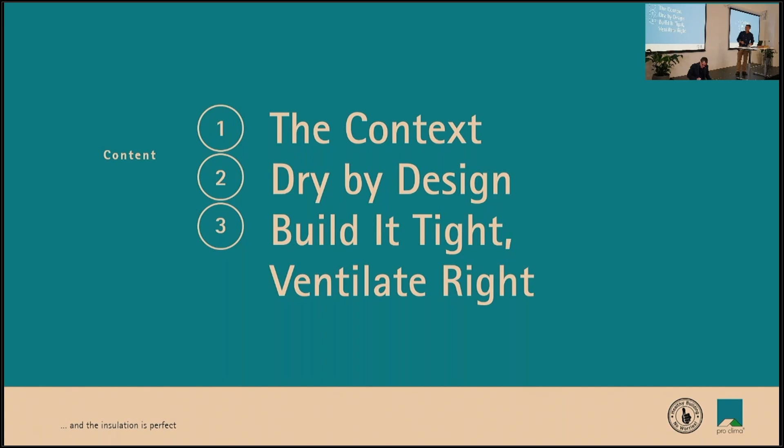In you come. Okay, clause E3, internal moisture. Yes, it is. It's not just bathrooms and kitchens. Now, the acceptable solution for E3, all it does is offer us acceptable solutions for drips and leaks. That's what most of it's talking about. So surely there's more to it than that.

As John said, I actually spent 15 years as a primary school teacher, and it introduced me to many a naughty child. They would sit at the back, disrupt the class, spread their malevolence, and cause damage wherever they could. These naughty children, though, were often just looking for acknowledgement and some kind of affection. If you can develop a relationship with those naughty people, give them the time of day and show some kindness, learn to understand them, they can become a very successful member of the classroom and go into great things.

Now, the naughty child of E3 is just the same. If we don't give it the attention it deserves, it's going to cause problems further down the track, and it's going to give us headaches into the future.

If we don't give E3 the attention it needs and apply some knowledge to it, the mold will spread through our homes, and the debilitating conditions that come with that are causing us enormous problems: asthma, inflammatory responses, poor attendance at work and at school. So the naughty little Johnny from E3, we need to look after.

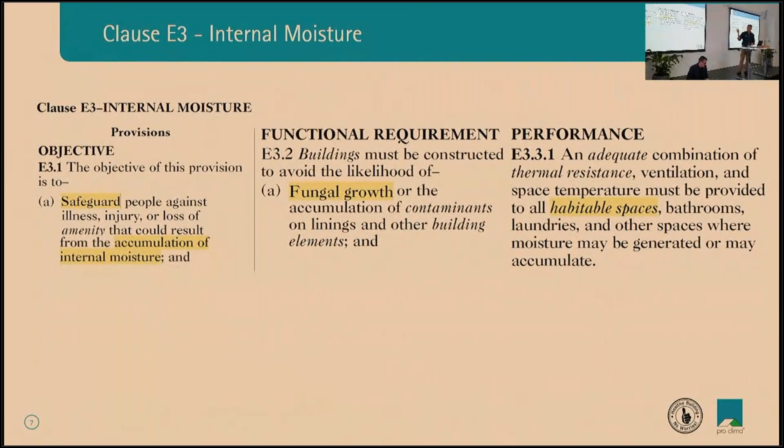Now, if we look, the E3 clauses are broken down into 3 parts. We have the objective, the functional requirements, and the performance. The objective is pretty clear. We need to safeguard from the accumulation of internal moisture. That's the objective of E3.

To reduce the risk of fungal growth in all habitable spaces. Well, if that's the case, why aren't we doing it? Why are we just hoping that steel framing without thermal breaks is going to work? Why are we just bandying it around and thinking, oh, well, it'll be okay?

Now, there's a big problem with this. Just like the naughty child in the classroom, if you ignore it, you wait, thinking it's somebody else's problem. As a teacher, I know I'm guilty of doing that. You have that kid that sits at the back and you think, no, it's term 2, I'm probably not going to change him. Term 3, well, it's nearly not my problem, is it? By the end of term 4, wait till Mr. Jones gets him.

And that's what we're doing with the problems when it comes to mold in our homes. We're making it so the designer pushes it onto the builder. The builder pushes it onto the homeowner. And by the time it's a problem for the homeowner, well, who's accountable then? Oh, that's because you're not using the home correctly. That's because you don't use the home right. Oh, so it's the homeowner's responsibility now to meet E3.

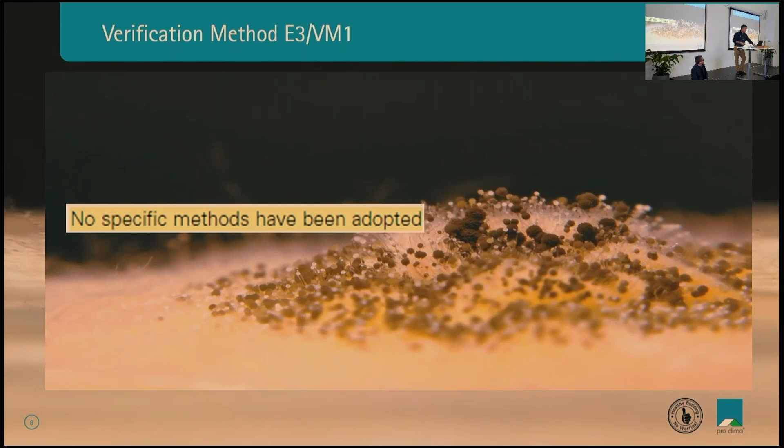So although the code knows all about naughty little Johnny in E3, we still have not adopted a verification method. There is no specific method adopted. We are using a trial and error approach. We are waiting to see what happens. Or let's put the steel beam in and hope it'll be okay. Or let's use this framing. Let's just use 90 mil of insulation. The trial and error method is proving not to work though, and we are getting mold in our homes.

Back in the good old days, we would have given Johnny just a clip around the ear and told him to sit down and shut up, all right? But thankfully, lots of things have changed.

Back in the good old days, we also lived very differently, and usually there was someone at home and the home fires were burning. New Zealand had a solid fuel dependency. We were burning coal and wood in our homes across the whole nation. Thankfully, that has also changed. The air is much cleaner as a result. I live in Christchurch, and pre-earthquake, you could see the smog thick across the environment, lying low. Now the air is much cleaner because we're not allowed to burn solid fuels.

But as a result, our homes are now getting stale air trapped inside them. And that's because the fires are drawing out, which we'll have a look at in a minute.

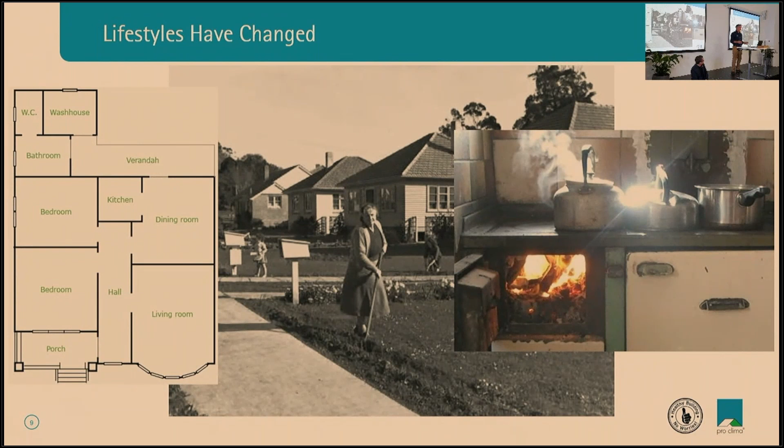When you have a look at this floor plan of a 1950s villa, I love the word villa because it's very romantic, but when you actually go and start flatting in a 1950s villa, there's nothing very romantic about it at all. It's extremely cold and uncomfortable.

You can see there that the wash house, top left there in the image, the toilet, the bathroom is actually outside the thermal envelope. So there's a floor plan on the left of the picture there. You've got the kitchen, the bedroom, the dining rooms. The living spaces are inside that thermal envelope.

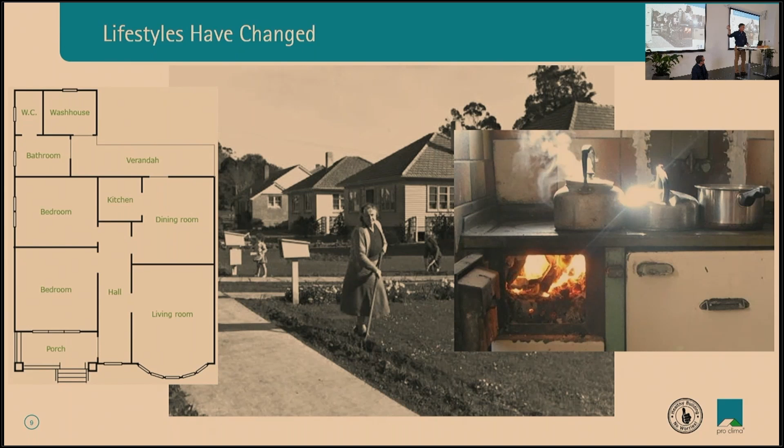And that was the way we used to live. But of course, it's the way we still do live. It's very much the floor plan of most people's homes in New Zealand, because not everybody is buying a brand new home. Now, the draw of the fire that was positioned in the kitchen there would suck air through that home.

When you burn in a wood burner or an open fire, it needs a huge air supply. And so what it was doing was continually drawing air through any nook and cranny that it could, through gaps in floorboards, through our double hung sash windows, under the door, and it was ventilating as it went the whole time.

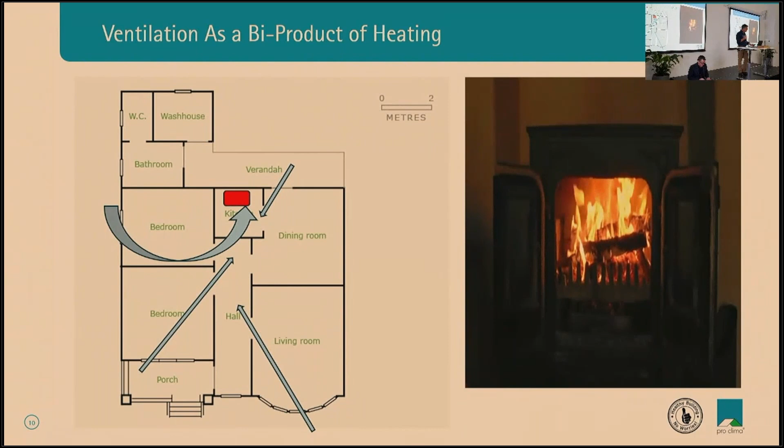So the heat inside the kitchen was often unbearable. If you can't stand the heat, get out of the kitchen. It was real. The living spaces were often overheated, while the extremities of the homes were far too cold to sit and snuggle down and read a book. And so the system worked for a while.

Now, in our major cities, the use of solid fuel is being banned, and the air is much cleaner as a result, as I said. But the lack of air movement causes an increase in relative humidity, and the mold will take hold.

The techniques mean that home is more airtight, and this is a good thing. An airtight home is a good thing. It's a bit like having an inner tube of a tire that it needs, if you want to pump it up, and you imagine the heat pump is like the bicycle pump. If you're pumping away and you've got a hole there, well, you just have to keep pumping, don't you? But if you can seal that home up, you're not continually pumping heat in.

But then you've got two people that have to be working long shifts. They're working full time. So they get up in the morning, these two occupants, they both have a shower because they've got to be nice and presentable for work. They then cook their lunches.

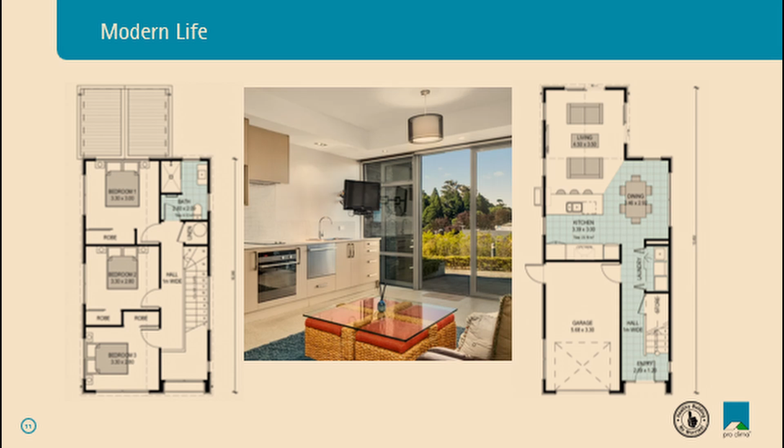People don't like to leave windows open because they don't want it to be cold. They don't want it to be risky. So now the relative humidity is high, and the mold has begun its day's work as well.

Mold's really important. It's a really important part of our ecosystem. Now these images here run through some of our temperatures from NIWA data, but if it wasn't for mold growing, our ecosystem would collapse. We need mold. It's one of the pioneer plants. Everything starts feeding with that and off that.

It's not a plant, of course, it's somewhere between. It's closer to being an animal than it is a plant, actually. If we have a look at the median annual average temperature, that's the map of New Zealand on the left-hand side of your screens.

You can see that most of New Zealand is a green colour. That means most of New Zealand is somewhere between 8 degrees Celsius and 14 degrees Celsius, over 24 hours, 365 days. There's only one little place way up north in Kaitaia that gets above that. So we're a heating climate.

That's really important. This is a climate that means we have to heat our homes. 20 degrees Celsius is a comfortable temperature for living. If we look at the graphs in the middle, we see the mean high temperatures. This is relevant because we're looking at what's going on at the highest points. You can see that our main centers, in orange in the middle, are only a few degrees apart.

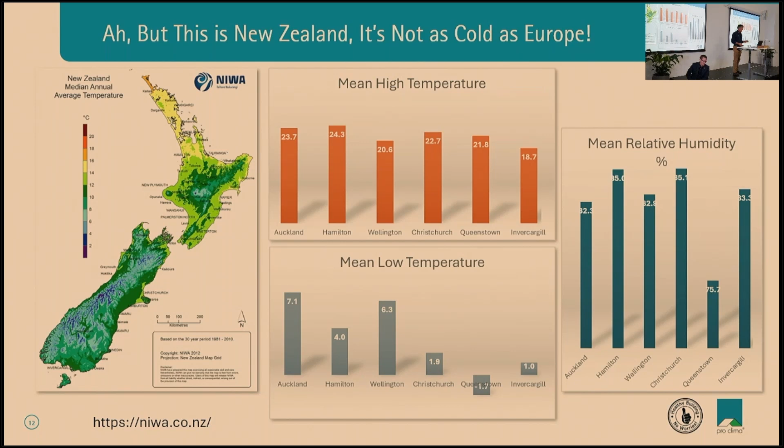This graph is a little bit strange, but I'll explain what's going on. On the right-hand side, we can see an image of a petri dish that's been left on the windowsill for a couple of weeks. Nothing has been planted in there - the mold spores just come from the air. It sits on a food source, it's got the right temperature and right humidity, and stuff starts growing. That's what happens in nature.

Let's have a look at a bit of why that happens. On the left-hand side, in the area that's now come up as red, you can see the number 1 - that indicates 1 day, how long it takes to germinate. If you look down the left-hand side of the graph, you'll see 65 to 100, which is a percentage of relative humidity. So between around 90 and just under 100, you get 1 day for germination of mold.

But the temperature is also important. If you look at the temperatures at the bottom of that graph, between 0 and 50, you can see it's somewhere between 20 and the mid-30s - it takes 1 day to germinate. So that means the mold spores, when they land on a food source, take 1 day before they start growing.

They sit there for a little bit, absorb some moisture, get some food, and start growing. So on all of your build sites, everything that's being built, you imagine how long it's exposed for before the doors are closed and you hand over the key. It's been covered in mold spores the whole time. It's got a high amount of relative humidity. The mold will start growing.

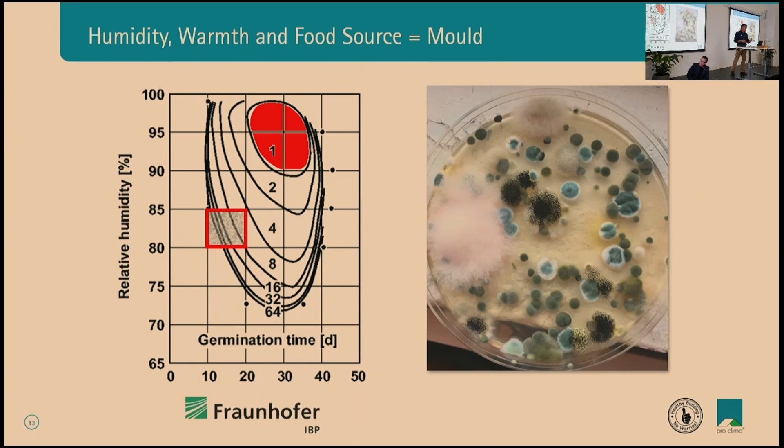Now, the code meets the needs of the homeowner if it's used correctly. The acceptable solutions seem to fall short of the mark, and words like 'adequate' certainly don't help. With no verification method, how is the industry supposed to know that their decisions of design and material combination will be adequate? But there are free versions of thermal modeling tools available - why aren't designers using them? This is where we go into our next poll.

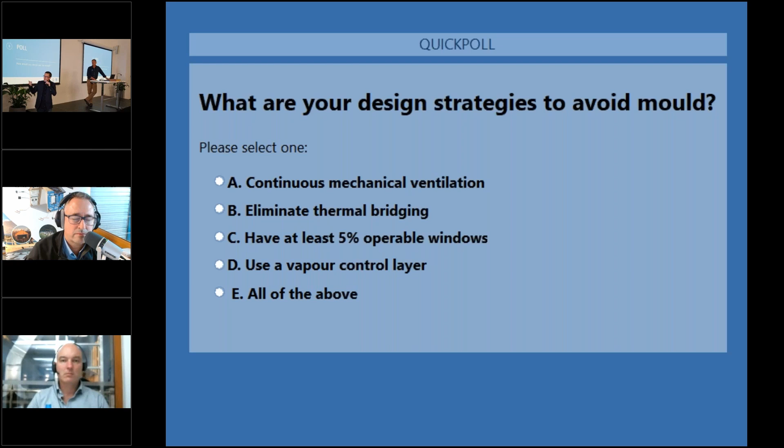Okay, cool. So what we'll do is call on our panelists to have a quick discussion on this one. If we can flick across to them, Richard and Simon. Hey, so Richard, you're not hearing us, I'm not sure why. Simon, have you got a comment maybe about the combination of all of those things?

Yeah, John, so from my perspective, I would go with A, B, and D. I think it's pretty important to have some sort of mechanical ventilation to ensure that we're replacing the air. Secondly, we want to do away with those thermal bridges. And thirdly, we need to have ideally a vapor control and air barrier to make sure that we stop the moisture going into the cold places in the first place.

Richard, your audio is terrible. Let's just kill that for now, and we'll see if we can get that back online. So I think we're going to turn this way again, and maybe, Ben, you could make... Oh, we've got them back up? No? Oh, the poll results from online. I'm sorry, okay, oh interesting.

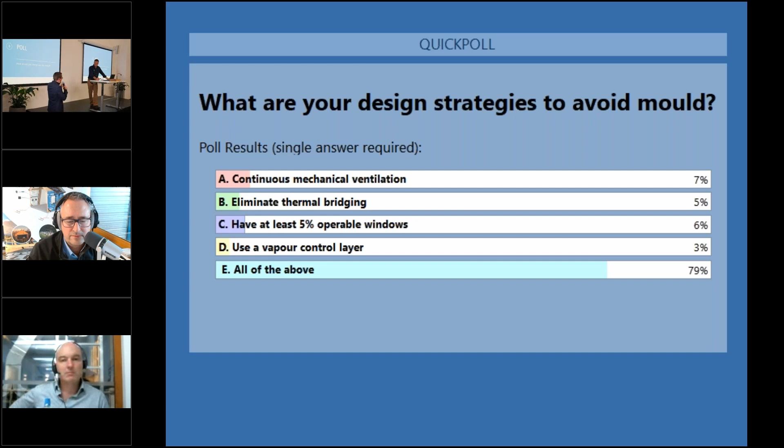Okay, so 79% of people said E, all of the above, and then we've got a mix, pretty much the same percentages across the other ones. If you were part of our H1 presentation, Kat talked specifically about what we do as a company, Pro Clima. We have a dedicated vapor control layer, but she didn't talk about that - she talked about every other material that you're already designing with that is already airtight. So that's the relationship with airtightness and then the 5% operable windows. I think you're going to dig into that in a wee bit. So if that was a bit confusing, Ben's going to unpack it all. Let's hand back to you, Ben.

Thank you, so I'm going to try and deconfuse them now. Yeah absolutely, that's your job. I'll do my best. Thanks for that, John.

Okay, so we're going to focus now on the design and how we can design out the problems with internal moisture. As we've seen, the code does know about mold. We understand it, it's there, and we also understand how it can be managed. But I wonder why we don't - why don't we do it then? Why aren't we thinking, I wonder if this will get moldy?

Two images here. This one on the left is taken just a few weeks ago down in Christchurch. It's a new build, lovely suburb, right on the waterfront. It's actually so on the waterfront that it's had to be built 1.5 meters up, just in case the inundation zone that was marked on the map a few years ago is real, and it's a flood risk. Because it's so close to the water, it's going to have high relative humidities. You're going to get sea fogs rolling in, and you're going to get a lot of moisture in the air there. I asked the builder what he was going to insulate the steel beam with.

He looked at me and said, oh, I don't know, I'll have a look at the plans. Nothing shown. Okay, he's got 6 millimeters between the steel beam and the top of that timber support there. So he's got to now figure out an insulation that's going to fit in there. So I said to him, I think you need to email your designer and ask them how they've mitigated the risks of E3, and I would record that, because at the end of the day, if this gets condensation on it, everyone's going to be pointing the finger. You don't want to be pointed at you, Mr. Builder, because it's not your money - you haven't got that kind of money.

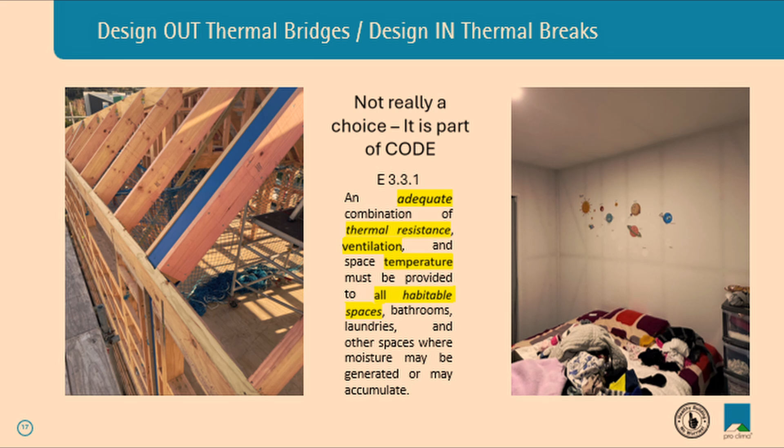The problems can be designed out, and they should be designed out. In fact, they must be designed out. It's not a choice, it's part of the building code. It needs to provide adequate thermal resistance, adequate ventilation, and adequate temperature in all habitable spaces. It's in the code, if it's applied correctly.

Now, Kärcher window vacuums. You can tell when it's getting cold in New Zealand because Mitre 10 and other hardware stores advertise Kärcher window vacuums. I had no idea what they were until I came to New Zealand. Never seen one before. I don't think they get sold much in Germany. We all know what it's there for: it's to suck up the condensation on your windows. And why is it there? That's double glazing. Why should it have condensation on it?

Well, it's because it's attached to something that is the third best conductor. It goes copper, gold, aluminium in terms of conduction. So we could have done it worse by using gold, admittedly, but we didn't. We used aluminium, and aluminium's a wonderful conductor. As one member of a very reputable window association said, oh, but that's a free dehumidifier - which is fantastic. It's not a good insulator, it's a great conductor. Kärcher do so well in New Zealand because we have such terrible windows.

If the Germans understood why we were doing it, they would just shake their heads. I know there's a few Germans in the room who would agree with me.

Now, the same goes with steel. Admittedly, it's not as good a conductor, but it's doing exactly the same thing, just where you can't see it. If the steel is as cold as that aluminium, that's how much water it's got sitting on it. Steel is great because it's easy to calculate, and it's readily available, but it is a conductor and a thermal bridge, and it needs to be handled very carefully.

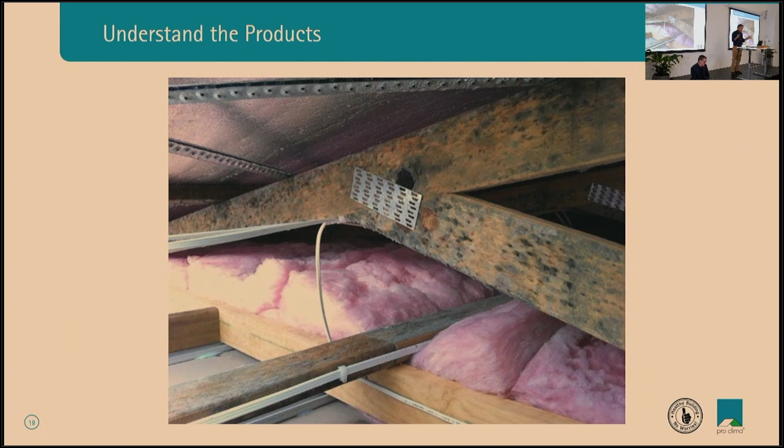So the condensation just sits there, at a nice say 15 degrees Celsius maybe, and a nice 85% relative humidity. And that's treated timber, so the treatment's failing because the mold is winning the battle. Mold will win - the treatment only slows it down. Eventually nature wins and the rot begins.

Now, what can you do about it then? Pro Clima has done a study - there's a QR code for it here. It's a way of verifying your design. If you have a look at the QR code, you'll get taken to our study website and you can download it. Now, the Pro Clima study...

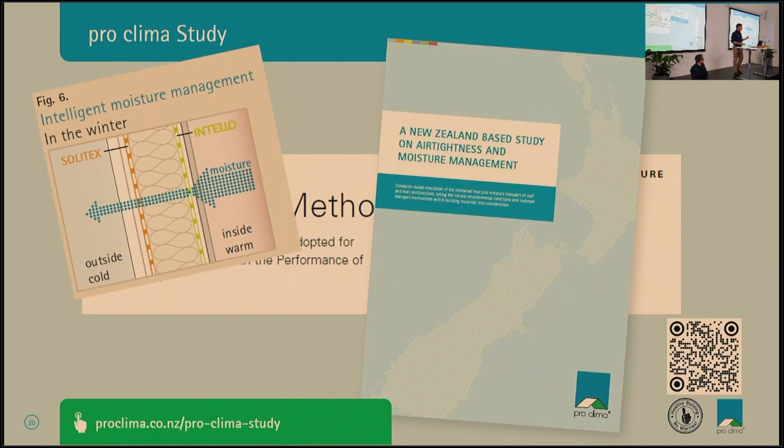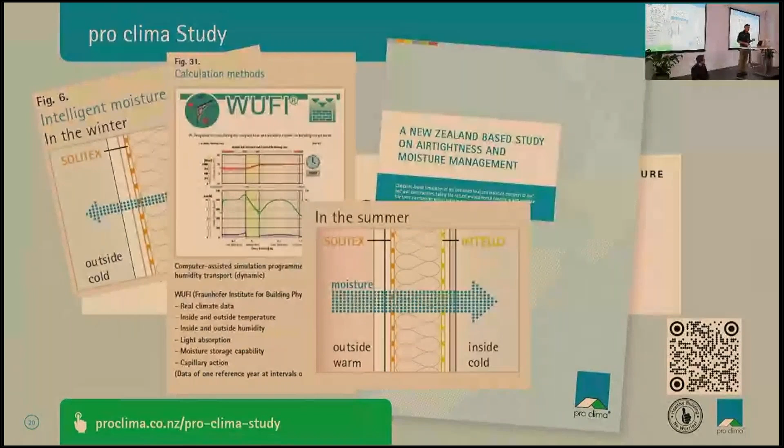It's analyzed different wall configurations, and looked at them both in winter and in summer, using WUFI. WUFI stands for Wärme und Feuchtigkeit Information - that means warmth and moisture information. It's not very creative, but it's German, we can't expect much. What it does is take all the parameters of the materials involved and the climate zones of the area, puts them all together in a great big spreadsheet, chews them over for a little bit, and spits out a result saying yep, that'll work, or no, it won't. I'm sure there's a lot more to it than that, but I'm not a scientist.

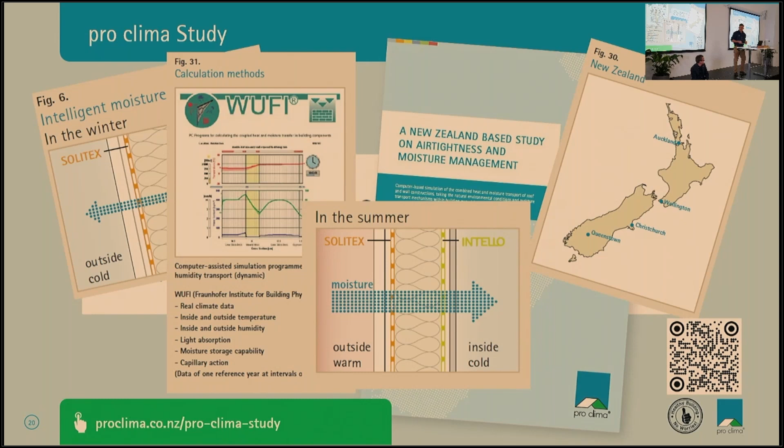It's complex, but there are free ones available. These QR codes show the Ubakus one - that's the top left image. That's a free modeling tool. You can go online, put some materials into it - I know our products are in there - and test your wall with different climate temperatures. It's free, it's there. If you don't know about it, why not? It's for designers and builders, it's there.

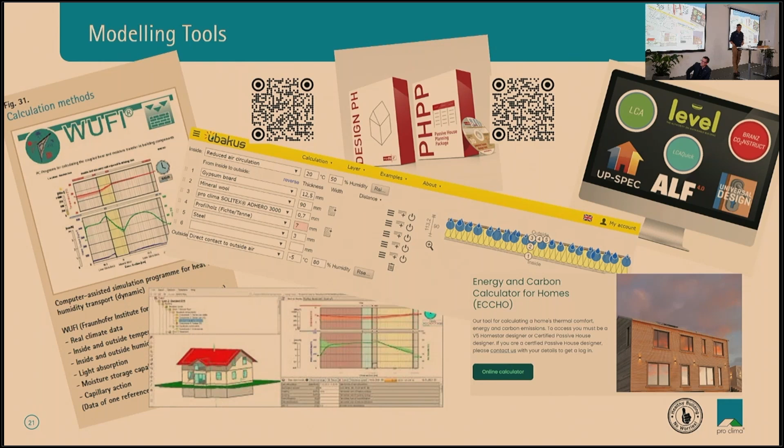Okay, so here's a couple of details, I'll explain them to you. Most of you will be able to look at it and pick exactly what they are, but some people won't, and that's okay. On the left-hand side, we've got a ridge, and there's a steel I-beam running through that ridge.

The I-beam's there for structure. The designer has acknowledged that within that structure, they're going to have to manage the temperature of that steel because they're aware of it. Awareness is the first thing, isn't it? Yeah, that's a risk. All right, well, how am I going to do it? Now you've got to come up with a clever solution.

Their solution is to insulate the coldest part of that steel from the external. They've insulated outside of the steel, possibly with a spray foam. The inside of the steel, where it's warmer, is not insulated. That's because they want the steel to be warm, above the dew point. We've explained dew points - they don't want condensation to form on that.

The diagram on the right comes from Bob Burnett, the super home movement, doing a lot of work in Canterbury to improve the designs of homes. If you can't figure out what it is, we've got the top of a sliding door shown at the bottom of the picture. Then we've got a steel beam as a lintel, and then the second floor above it. What they've done is brought the steel beam into the warm part, into the thermal envelope, instead of it being out there where it's cold, with the purpose of keeping it warm. If it's warm, condensation won't form in it. It's just two ways of applying the same knowledge to design out thermal bridges, which helps with the risk of condensation on those steel beams.

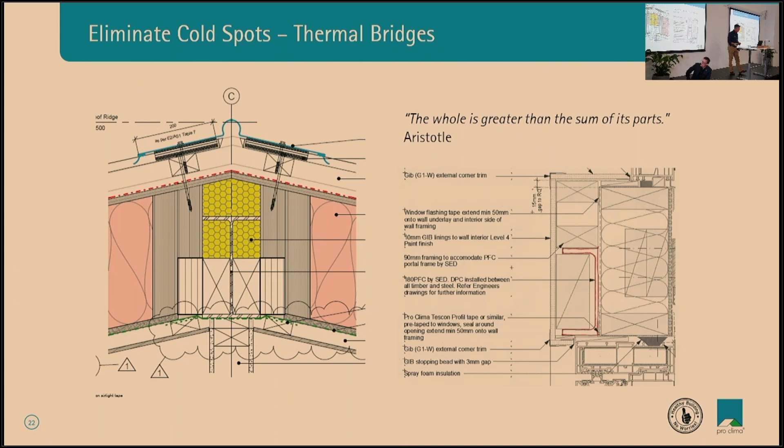So we're going into our next poll, and we're going to have a look now at the ventilation.

Okay, so why do we use - and this is a question which has come up from our online audience as well - why do we use 5% of floor area as openable or operable windows for ventilation? Answer A, it's a nice round number that's easy to calculate. I like that one. B, 10% would be too much and windows would be more expensive. And C, it's based on international best practice. And D, we always have to have a Frank Lloyd Wright answer, as you already know from our quiz coming up tonight, but Frank Lloyd Wright used that ratio. So if you're online, you can fill in your answer to that one.

I'm going to ask our panelists to come on board in just a moment. And for our people in the room, what is your answer? Not what the right answer is - who cares about the right answer? Who chose A? Let's just start at the top and go down this time.

All right, so it's a nice round number, easy to calculate, which really means somebody made it up. Not a bad answer. B, 10% would be too much - who chose that one? That's actually kind of connected to A, they're almost one and the same. All right, but I didn't say that.

The panelists are going to talk about this in a minute. And C, it's based on international best practice - who thinks that one? All right, there's going to be some bonus points for what year it was introduced, we'll get to that. And D, just a fun one, Frank Lloyd Wright made the rule, Frank Lloyd Wright made it up. Nobody chose that one? Anybody?

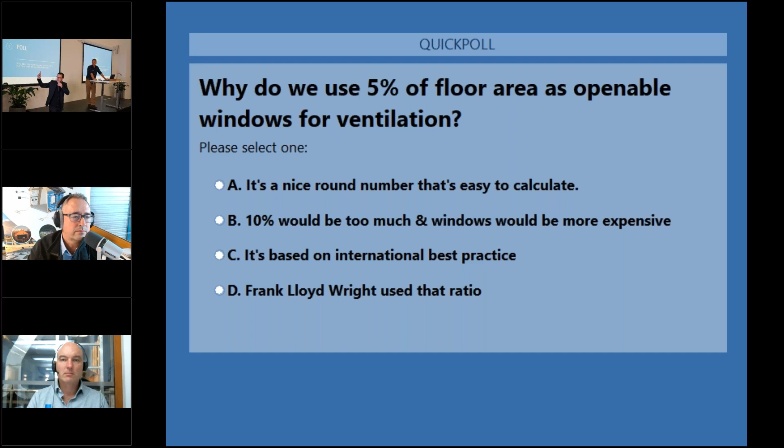All right, okay, online, let's have a look and see if we match what was online. So most of our people here said it's C, based on international best practice, and that is reflected there, so 69%, 17% - I do like that answer, actually, I quite like the first two. So I'm going to hand across, 5%, Frank Lloyd Wright, winner on the day - not quite the winner, he came last.

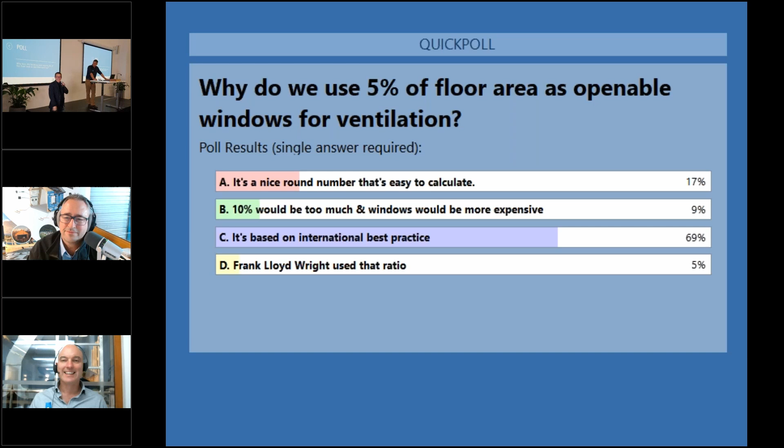Okay, so let's hand across to Richard and Simon. What do you guys think about the combination maybe of A and B? And I hope you've got those answers in front of you too. Richard, we're going to try you first. Let's see if your audio is going to run for you this time. I'm going to take you off mute. Cool, you can hear me, John?

Excellent, yeah, that's interesting answers. Yeah, a few people with a bit of a sense of humour there answering D. Could have been him, who knows? And that's the whole thing.

No one does know. I know Ben did a bit of a deep dive on this and couldn't find why we use 5%. It could be international best practice, it might not be. It might have just been a number someone chose on the day, maybe last thing on a Friday, just to put a number down before the weekend to sign off that part of the building code. But the point is, who does know? It's all a bit of a mystery.

Let's take out the mystery. Let's make it calculable. Is that a word? I think I just made a word up. Not bad. So when you say make it calculable, what do you mean by that? Can you just dig into that for a sec, please?

I guess, yeah, windows are unreliable. On a still day versus a windy day, having one window open on one side of the house or a window open on both sides, or if it's cold, hot, or dusty - opening windows as the ventilation strategy is unreliable because it changes. So having a ventilation system that's running all the time, supplying the right amount of fresh air, extracting air from the house and supplying fresh air, is something we can rely on no matter what the weather is, no matter who's in the house, no matter what's happening outside. So let's have a ventilation system that's a bit more reliable - that's the key thing.

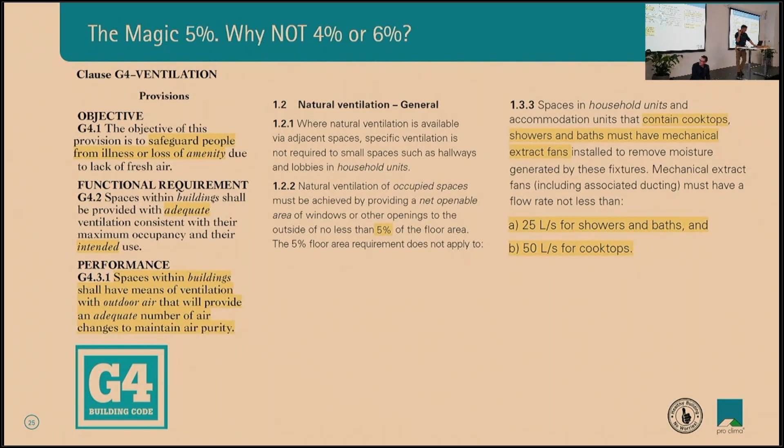I want you to just focus on a few key words. Now, G4 is all about ventilation, and we'll see what it covers. The objectives are clear: we need to safeguard people - that's what this comes down to again, but also amenity, from loss of amenity and illness. We've got to look after the people who live in our homes. We've got the word adequate and the intended use, and we need the adequate number of air changes.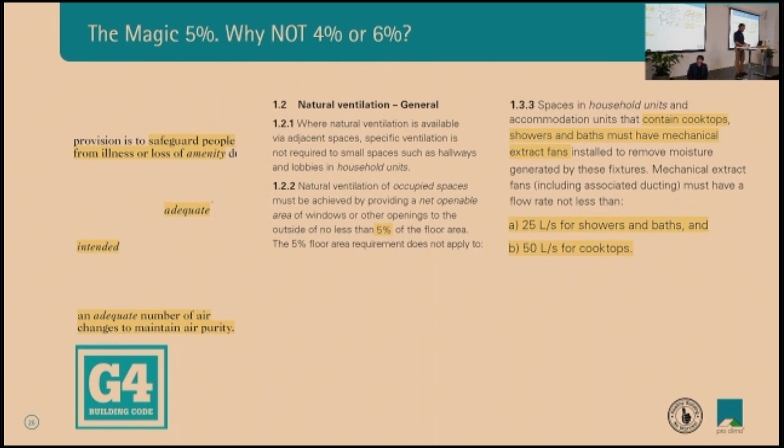Now, who or what defines adequate air changes? 5% pops up there - yes, our magic 5%. I did do a little bit of homework on this. It was brought in from Europe in the 1940s. It's 5%. I did ask why 5%. Nobody knew why it was 5%. Nobody could tell me. I went to the guys at university, I emailed them - why is it 5%? I don't know.

My answer is this: 10% is really easy maths. Anyone could do 10% of 200 or something like that, can't you? 200 square meters, 10%, that's 20. Oof, that's a lot. Let's make it 5. Yeah, all right, 5, done. There's no other answer for it, unless you've got a better one.

I think the answer is that you've got to have 10% of the floor area have windows, and so 5% was half of the window area. And why do you have to have 10% of the floor area of windows? And why is that enough natural light? It depends what direction you're facing, surely. That's interesting, thank you for adding that.

That's great, so we've got this magic 5%. Now, we also have to look at the scope of this, and we're talking about cooktops, showers - must have mechanical extract fans, and we are giving some parameters for that. So G4 does give us a little bit more to work on.

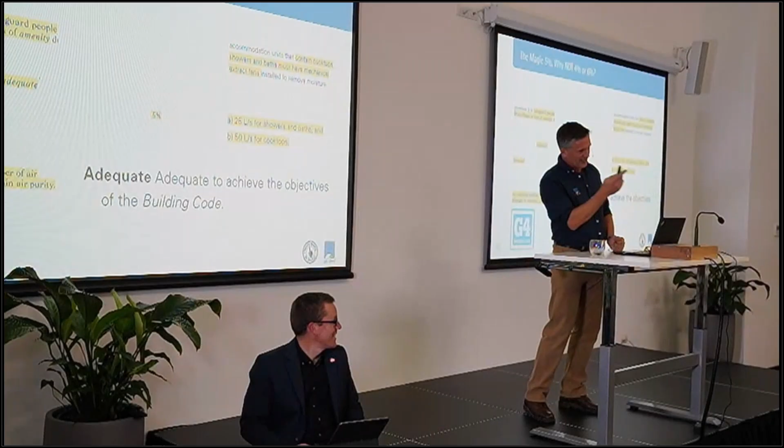By the way, if you're not sure what adequate means, the definition according to the building code is that it's adequate - that's actually what they've got written down. Adequate means adequate to achieve the objectives of the building code. So round you go - oh, so what does the building code say? Oh, it's got to be adequate. So what is adequate? Adequate enough to not be moldy. Oh, well, prove it.

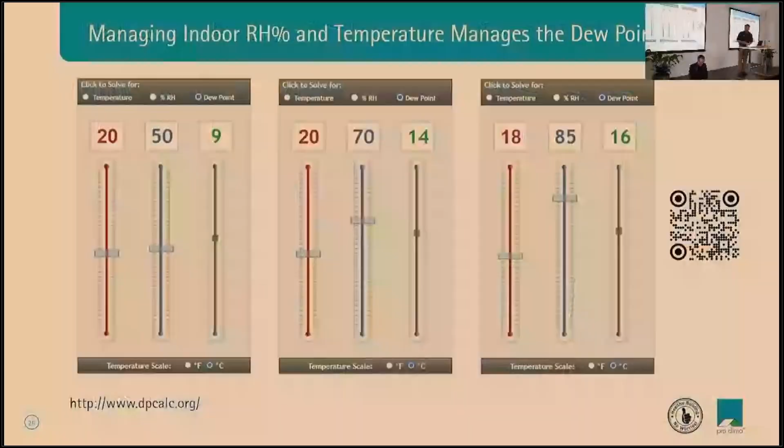Now, let's move on to understanding a little bit about relative humidity. We've got 3 charts here, and there's a QR code of where you can download or where you can get to this to find out how to calculate the dew point. On the left-hand side, we've got an ideal setup - that's 20 degrees Celsius and around 50% relative humidity. It's also nice round numbers, easier to deal with. That gives us a dew point of 9 degrees Celsius.

What does that mean? It means any surface that is 9 degrees Celsius in that build has the risk of condensation forming on it. Of course, anything below 9 degrees, that risk increases. So anything that's 9 degrees - that might be the glass, might be the aluminium, might be the steel beam that's hidden behind the structure.

At 20 degrees and 70%, looking at the middle now - that's after we've done the cooking and had a shower. And everyone knows that when you have a shower, the mirror steams up. Why? I was just staying in a hotel last night, I had a nice warm shower, mirror was all steamed up. I was thinking, that's interesting - even though this room is at 20 degrees Celsius, the mirror must be at 14 degrees Celsius. I've got condensation forming. That's because the relative humidity has gone through the roof in the bathroom and it's condensed on everything.

It's not just on the mirror, but it's at 14 degrees - that's where the dew point is in that mirror, that's where the dew point is in that situation. So after you've done the cooking, had a shower, hung up your washing, if you've got 70% relative humidity, 14 degrees is the dew point. So anything that's 14 degrees now has water on it.

Now, a more realistic scenario, 18 degrees Celsius, because most of us don't heat our homes to 20. By the way, just in case you weren't aware, we have no aspect of the code that deals with what temperature a room must be, unless it's a kindergarten or an old people's home. So the house that you build does not have a requirement for comfort - there's no clause for comfort. So 18 degrees Celsius, and it's a soggy 85% relative humidity. This is a bad scenario, but it means there's only 2 degrees difference, and 16 is where the dew point is. So hopefully this demonstrates the relationship.

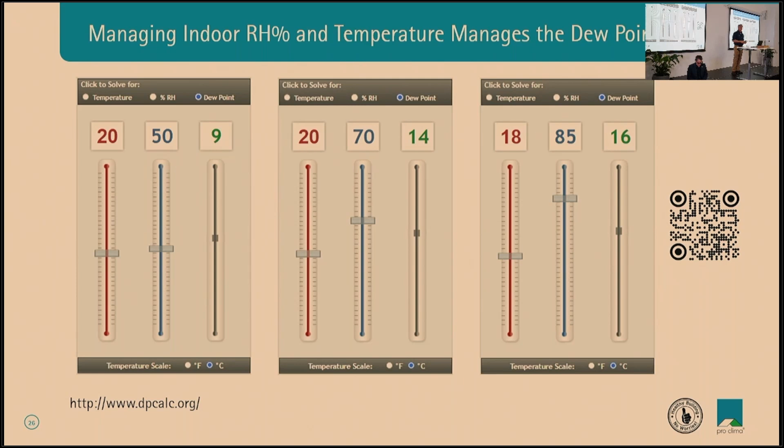We need to also understand what happens in the relationship of relative humidity a little bit more. Ambient temperature and relative humidity sits around 10 degrees and 85%. We've seen that across the nation, around 10 degrees Celsius and 85% relative humidity. So that's the outside air shown there at the top. If we just warm that air up to 20 degrees Celsius, our relative humidity drops, because the water amount hasn't actually changed. The amount of water in the air doesn't change. You're heating the air up, the air expands, so the relative humidity drops, which is great.

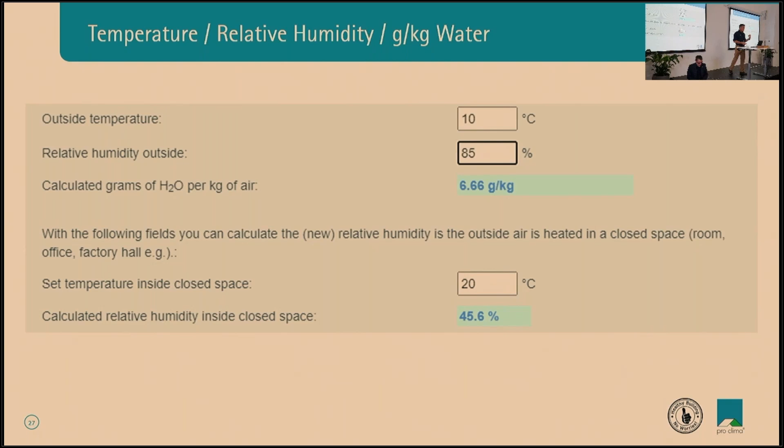This works in our favor because it means that if we can exchange the stale air with fresh filtered air and maintain a temperature, we can provide a safe and comfortable environment that is not always requiring a heating input. Funnily enough, that's exactly what a mechanical heat recovery ventilation system does. It keeps the air clean and it keeps it warm.

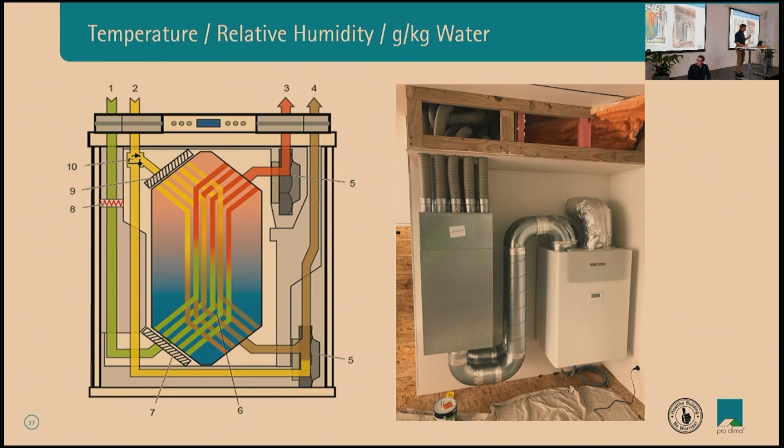Now, it looks complicated and it looks expensive. And yes, of course, it does come with a cost. Everything that is progress has a price. But just like when we got anti-lock brakes for our cars, airbags, Bluetooth, all those things, they were expensive at first. Now they're standardized. And as we progress through our changes to our homes, they will become standardized.

First part of the presentation, I showed you an image of a villa with a wood burning fire in it, and I had some arrows pointing from windows towards the wood burner. That was the ventilation system that was used at the time. This is the updated version. What this does, first of all, it uses very little energy. It's like running an electric light. If you think it's too expensive to run, then it's also too expensive to have a 60-watt light bulb in your garage, because that's the amount of power that it uses. It's a very, very tiny power draw. It's like leaving a light on.

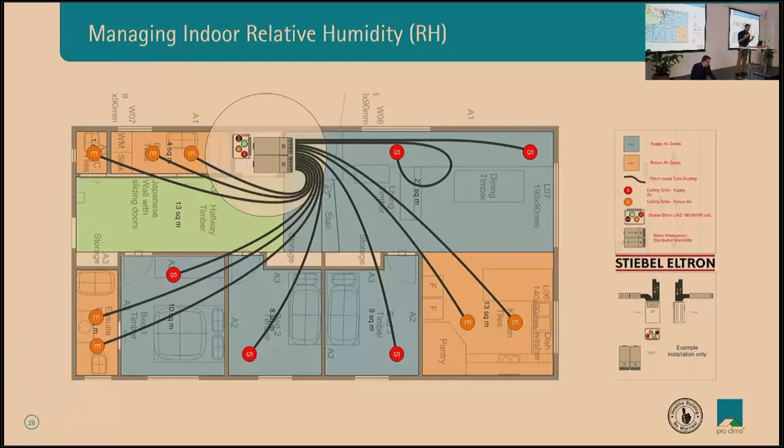We've got a supply air going into the living spaces. So what's happening there is the extract air is passing over the supply air, and the supply air is now warm and dry. And it's being supplied 24 hours a day, just gently, trickle feed. By doing that, the air is constantly moving and it is constantly being maintained. The CO2 levels are being maintained and the temperature is being monitored.

Now, putting that into a design, yep, this is where the homeowner and the architect thought it would be a good place to put it, nice and out the way, poke it in the corner. The circle shows the efficiency range. If you have to run the hoses for long distance, they lose their efficiency, just like power loses efficacy, there's a good word for you, if it's running long distances. So best place to put it is more centrally. If you don't design your home with this in mind, it becomes complicated. You need to create space for it. Placing it centrally means it can operate at maximum efficiency.

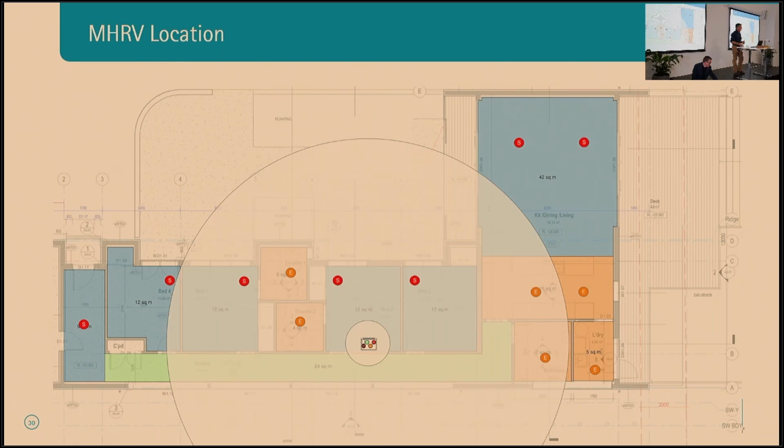But there's also a cost for doing things badly. The big picture is that living with cheap, damp, mouldy homes, there's a price too. 30,000 children a year are hospitalised due to asthma in New Zealand. That's 30,000 children taken to hospital — they don't just have a little asthma attack and settle down at home, they go to hospital for their asthma. I wonder what the medical bill is for that. Surely there's a cost to that.

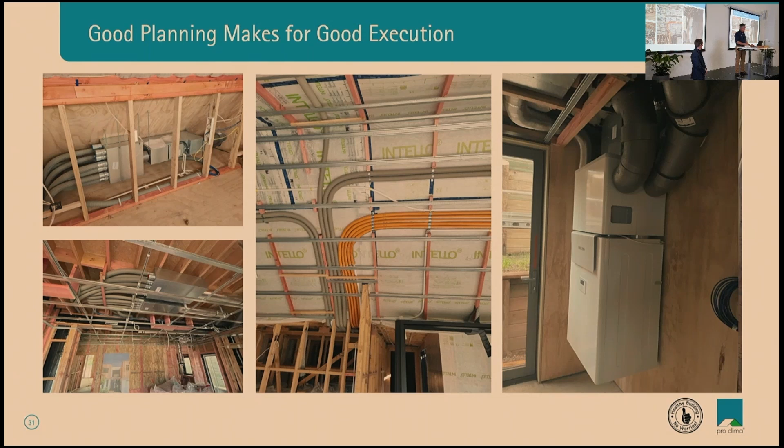We've examined the context of New Zealand and the New Zealand climate, and looked at how it relates to our building code. Now we need to do better because the code tells us to, because our changing climate is demanding it — we can't just have fossil fuels burning in our homes like we used to. And it's because our children are getting sick. To me, that alone should be reason enough for us to do something about it. We've briefly seen how to do it through intentional design, correct material choice, and by giving the naughty little Johnny in E3 a bit more attention.